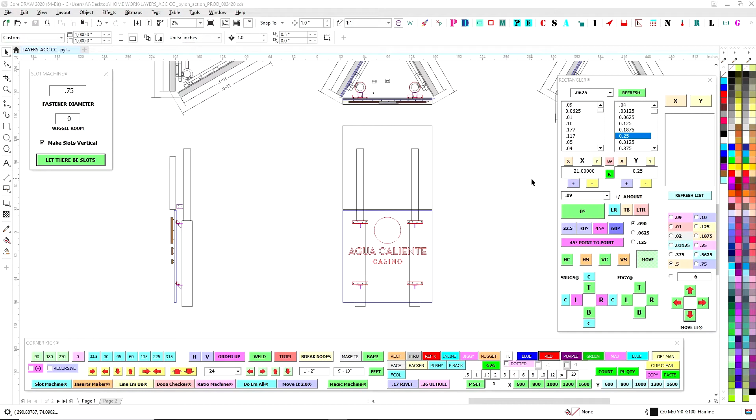All right, so dialing in the pylon sign. I got the panel now that you gave me full size, this is kind of what I came up with. Just see if this design works, and then I'll go from there and start framing it in.

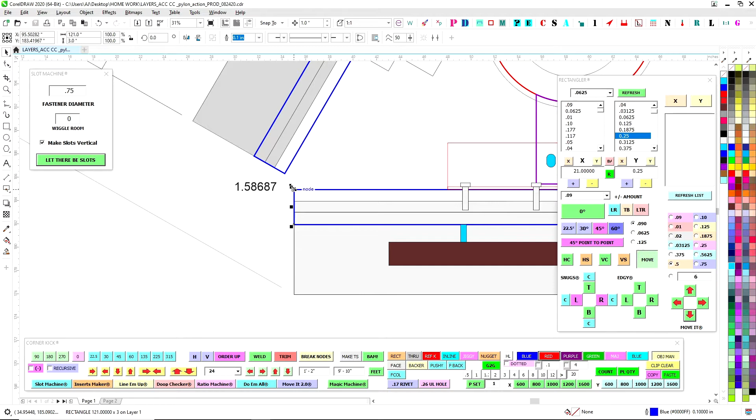So I have the panel here in blue. I have it at 3 inches deep. Don't want to get any skinnier than that or move back anymore, because then this closes up pretty close. So right now I have 1.5 inches-ish right there. This would be the face of the cabinet looking through it.

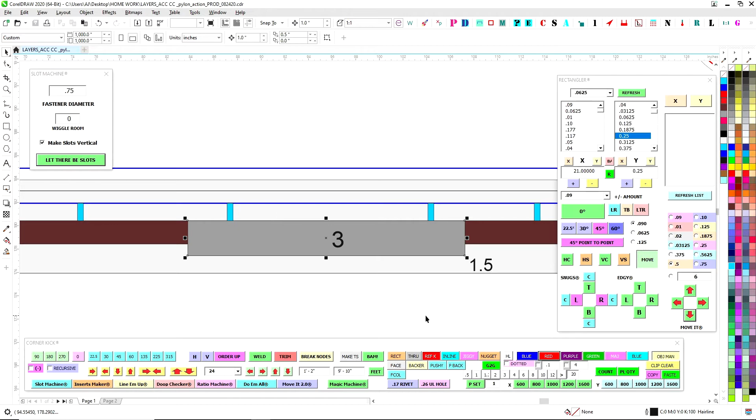And then doing a 1.5 inch standoff with a 2 inch reverse channel letter there and a 3 inch double glow. So this gives us our 1.5 inches out the back, and this gives us 1.5 inches away from the face of this guy here.

We'll have fabricated quarter inch custom angle pieces that will sit atop a custom gusset. So this gusset is similar to these guys here, but because these are for a 9 inch radius or 9 3/4 or whatever it is, this guy here is for the 14 inch radius. So this will have to be a different gusset anyway.

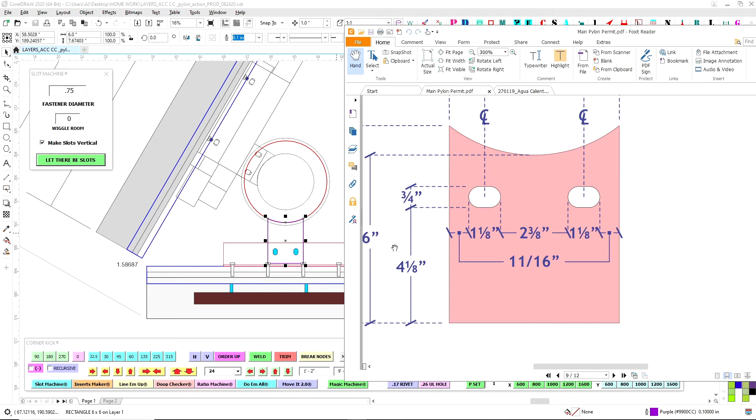So we can move these forward so that it'll catch there. I kind of compromised between what we had drawn. We don't need the 3x3 steel and all that stuff, like pushing this all the way out with the steel. We don't need that. So I figured we could just bolt directly to the gusset.

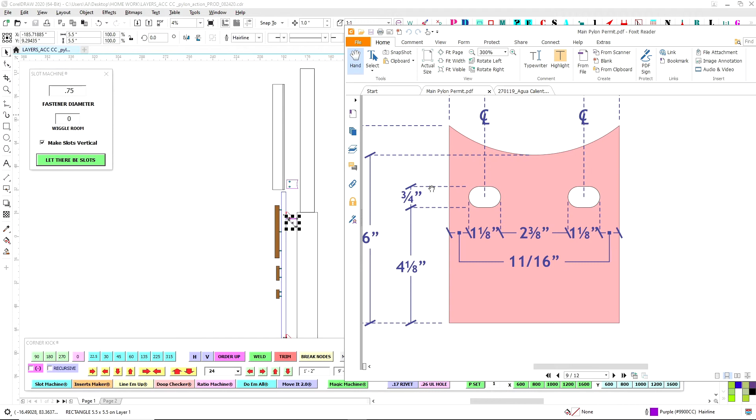But this plate here is the same as the other gusset, this guy here. So we could just order more of those, keep that the same, but we'll just need 12 new custom brackets, gussets, and then we can tell them where to weld those on.

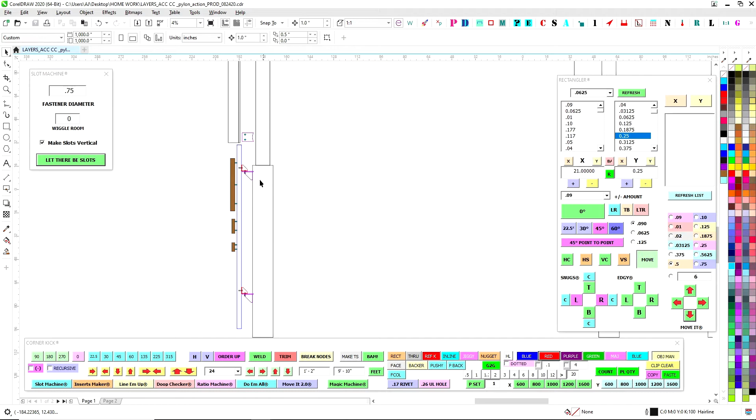So it's similar, and it's all even numbers from the top. You had 9'10" to the top of the plate for that. So if we bring that 4 inches down, I've got this at 24 inches there and 18 there. So it's all even numbers where these brackets go, so it'll be easier for them. And then we can bake in a little bit of play up and down for these to help.

And then I'll figure out the framing for this once we decide this is what's up. Also, because we'll have to lay out the seams for the face pieces, this is too big obviously to do full runs. I'm thinking somewhere in here I'll have seams for face panels here and here, and because this is obviously there, so this will be cut into threes, the faces.

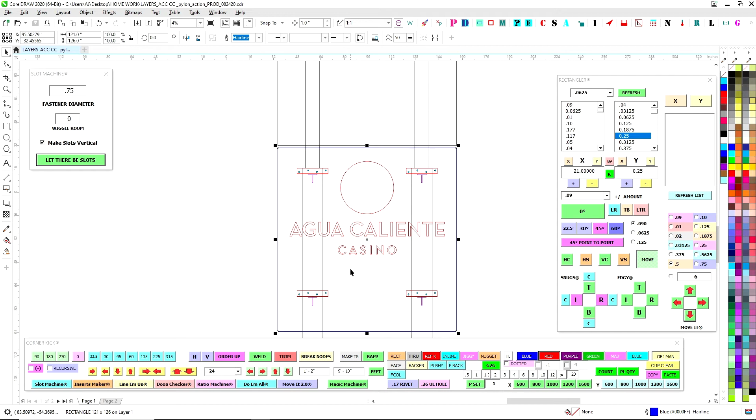We can maybe do a panel here once I get the framing figured out. Then that should be able to creep in. These are at 24, and I believe obviously there's the garden wall. So I don't know, maybe if we have a panel that goes up this high on one of them that's not quite so visible, maybe this could be where we take this face off and get in that way.

But we can jump off that once I can start framing this in, like I say. So if you like the way this looks...

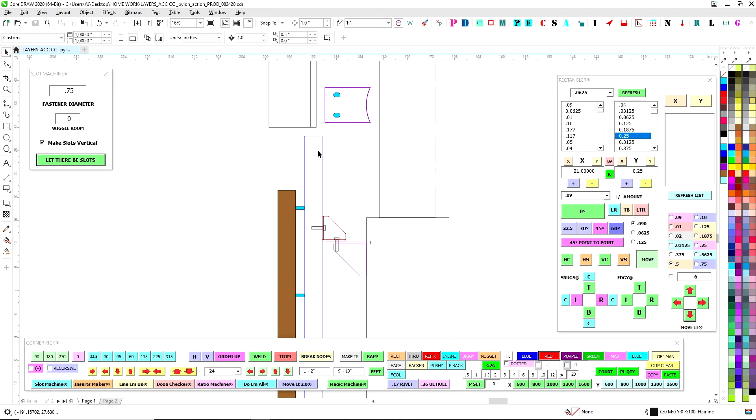Let's see, yeah, so just to clarify, this is 1.5 inches back. So this is a 3-inch logo, and this will be the face of that. So you have 1.5 inches back there, and this is an inch back from that. But you won't see that too much.

But yeah, we were talking about having our mesh guys here to kind of close that in, and then we can just do a baby one there, and it just kind of all steps proportionally. Anyway, just give me some feedback on that, see if that's the direction we want to go, and I'll start laying it all out.